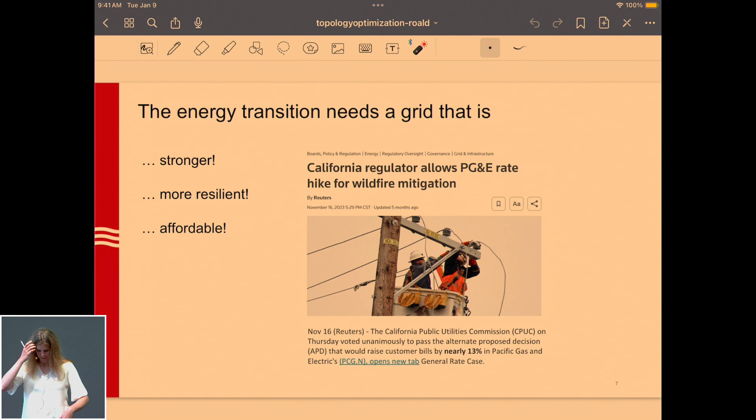So where is the topology optimization, which I promised? What I will say is that topology optimization matters everywhere here because the grid is so important.

Here, what is topology of the power grid? Well, the topology of a graph is essentially the way nodes are connected with each other. So the topology of the power grid you can think of as the way all these different nodes and buses in the network are connected to all the other buses.

So yeah, an outline. So we have 3 hours here. I thought, wow, 3 hours, that's a lot of time. So what should I try and teach you here today?

So the first thing I wanted to talk to you all about is topology optimization. What is it and why is it useful? The goal here is really just that you all should understand what topology optimization is and how it can be useful in different settings.

And then we're going to talk, I'm going to bring a simple example of modeling and optimizing system topology. Here, essentially, the idea is just to give you an example of how do we actually model this mathematically and talk a little bit about the challenges involved in solving those problems. So that's kind of going to be the introductory first part here.

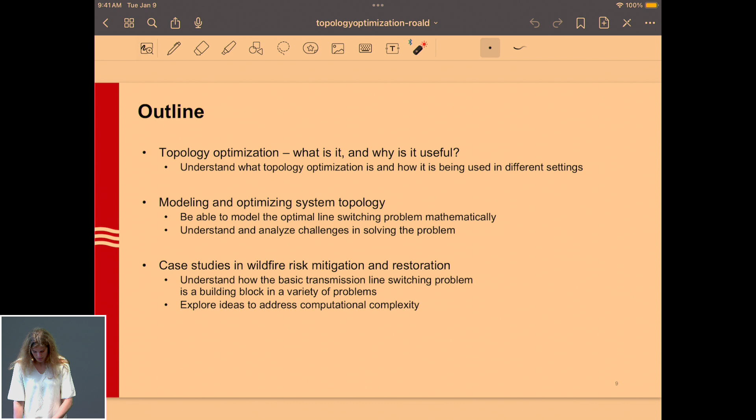And then we are going to do some case studies, looking at wildfire risk mitigation and restoration, where we are going to use these ideas of how we need to optimize the topology of the grid in order to achieve better, more resilient grid operations. Does that sound good?

Yay, great. All right, so topology optimization, what is it, and why is it useful? And so here, again, since it's morning, I can see most of you have found your coffees, that's great.

Okay, so anyone has any thoughts they want to share? How does the topology change?

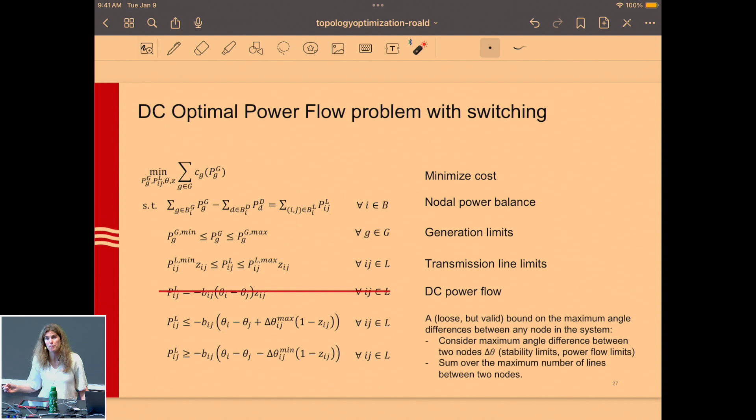You can derive those either from stability limits or from power flow limits. If you have a line that is energized, it automatically gives you a bound on how far apart the angles can be, based on how large the power flow can get. So you can leverage those to get loose bounds on how large the angle difference could become between two different nodes. If you insert those numbers here, you have a valid big M constant. It's possible to get tighter values depending on the type of problem you're trying to solve. It can be worthwhile to spend some computational effort to figure out the tightest values you can find, because your problems might solve so much quicker later.

Okay, any questions on that? Is it useful to go over this? Maybe, hopefully, I don't know. Yeah, okay, yep.

Difference in the voltage, in the angles. I understand that is used in the assumption of the linearization of the transmission or distribution grid. Right, the assumptions that we make. Is it also technically necessary in a physical grid to have the angle, the difference angle?

Yeah, so it's actually kind of interesting. In the DC power flow, they don't hold the same importance as they do in an AC power flow. In an AC power flow, these angles are inside the sine or the cosine. So when you're looking at an AC power flow, there are stability limits that determine how large your angle difference should become. You should, for example, never exceed 90 degrees, because then you'll get an unstable power system. You also typically don't want to go all the way to 90 degrees, you want some leeway there, so a range of maybe 30 degrees is common for an AC power flow problem.

Just to give you a sense of this—I don't know how many of you typically do integer optimization—suppose you have a problem with n binary variables and want to solve it by brute force. Suppose you have a really fast computer that can check 10^9 combinations per second. If I vary n, the number of variables, I get different times needed to check all combinations. With 10 variables, it takes 1 microsecond.

So if you solve a small problem with these integer constraints, you might think that was really easy. But as you go to 30 variables, it takes 1 second. At 50 variables, 13 days. At 70 variables, 374 centuries. And at 100 variables, something like 3,000 times the current age of the universe. So 100 variables is not a lot by brute force—typically the problems we want to solve have a lot more variables, and you'd need a really, really long time to solve them.

So that's the bad news. Doesn't sound very good. The good news is we have good processors. If you look at the speedups that happened up till around 2016, since 1990 processors had a speedup of about 15,000 times—they got 15,000 times faster. So now you can check a lot more combinations a lot more quickly.

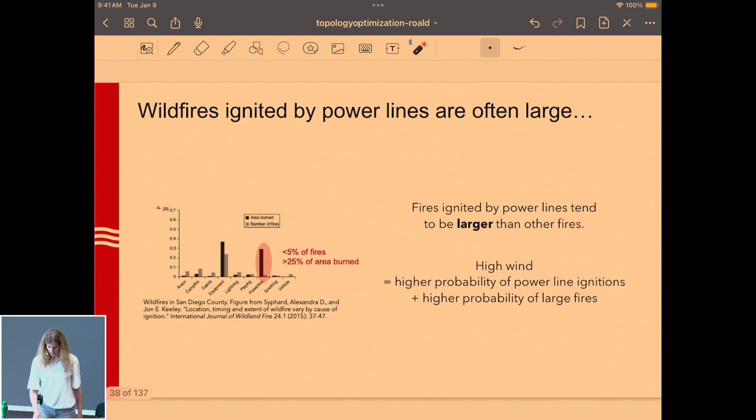Why are these fires so bad? I think it comes back to this question that it often happens during very high wind conditions. So when the fire picks up, it just burns very quickly. In Hawaii and also in the Camp Fire, definitely the cause was just that it spread very rapidly once it started. So there was very little time for people to evacuate, to get away before the fire was just there.

Okay, and then of course here I'm talking about the U.S., California, Texas, the Western U.S. generally, Australia, but also globally, wildfire risk is on the increase, and so this is really something that is important, I think, for us all to consider.

Our goal has been to try to help build models that help utilities plan better. There's been a lot of scrutiny in the US because of these large fires on utilities, particularly in California. I think the California utilities are very good at modeling and managing this risk. But there are a lot of other places, for example in Washington, many small rural cooperatives in different parts of the US that are struggling with knowing how to actually handle this risk.

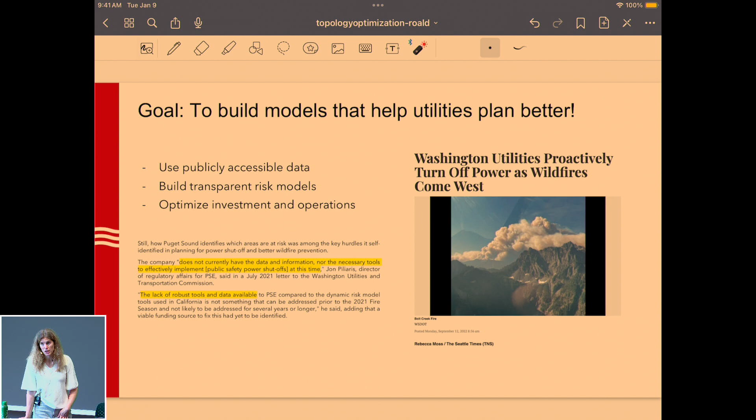So what we've been thinking is that it's important to build models that use publicly accessible data, have transparent risk models, and can help utilities optimize their investment and operations in a coherent way. There's a citation from the Seattle Times on a utility in Puget Sound saying that we really don't have the data or information yet. So these are gaps that would be good to try and fill.

So with that, how do we think about modeling and mitigating wildfire risk? First, in terms of modeling, one way of thinking about wildfire risk is roughly speaking, the product of both a probability that we will have an ignition and the size and intensity of the resulting fire. If you have a very small fire or a fire that burns with low intensity, it's usually not that bad. Many landscapes are fire adapted, meaning that they are meant to burn.

That is a little challenging these days because ecosystems are changing so rapidly due to climate change. That also has an impact on how they burn. But if you have a place which has a lot of biomass built up because you have a lot of trees that have died, or you've been doing fire suppression for a long time, you tend to get very intense fires, which are very bad.

And so the kind of data on this second part is very unrelated to power systems, right? I would say that it's not the utilities' fault that the climate is changing, though they maybe played some part in it. I think it's a little harsh to say it's your fault directly. So they happen to operate in an area where the wildfire risk is a lot higher in many cases.

And so the kind of data you can find on this is things like what is called the Wildland Fire Potential Index, which we've been using quite a lot. This uses satellite data, weather forecasts, and fuel models from across the United States to measure the potential for large fires.

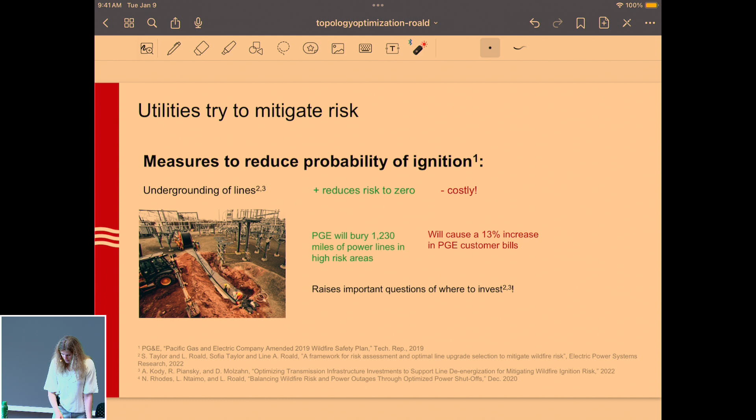Another type of wildfire risk mitigation is just cutting trees better. You can do better vegetation management, cut trees more often, making sure they're far away from the power lines. This is already being done, and if you also do better maintenance of your equipment, you can prevent it from failing so easily. But some risk remains, and there's a significant ongoing cost to vegetation management that someone has to pay for eventually. This is an operational cost, so it does not get passed on to consumers the same way undergrounding does.

Then there's another thing you can do: changing the protection system settings. As I was talking about the reclosers, they close again and again, and every time you close again, you start one more of those like lightning strike fires. It's like pushing the button on that lighter. So one way to try to reduce wildfire risk is to avoid reclosing as many times. But that has the impact that if there's an outage, people are out of power for a lot longer. If you change these settings, the number of outage hours for customers increases significantly, so that's also a challenge. And it's still not clear, some risk remains. When I say some risk, it's partially because I don't know what that number is, and I don't think anyone really does. So these are important questions now around whether we can gather the data to do better risk assessment here.

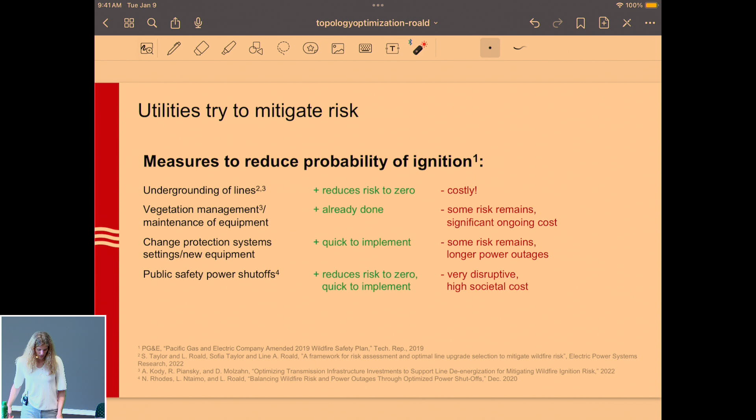And then lastly, the last one I want to mention is public safety power shutoffs. That's the one I'm going to focus on, so I'll talk about that in more detail. I don't know how many people here have heard about the public safety power shutoff?

Again, okay, yeah, our US, California, and Wisconsin participants.

A public safety power shutoff is when the utility says, I'm going to turn off this power line because it goes through an area with a lot of trees. If that line touches one of the trees, there could be a fire. This is too high a risk, the utility doesn't want it, and presumably no one else wants it either. That's why they've dubbed it public safety power shutoff, for the safety of the public, to avoid wildfire ignition. The idea is to de-energize or shut off power lines in high-risk areas, which reduces wildfire risk. But if I shut off the power line, I also cannot send any power across it, so people get power outages.

I first read about this and started reading the plans for these public safety power shutoffs back in summer 2019. I thought, wow, this is really crazy. There had been some regulatory action that allowed much larger public safety power shutoffs. Sure enough, in October 2019, there was the largest such power shutoff to date. This is very effective in reducing wildfire risk, but also highly disruptive to customers.

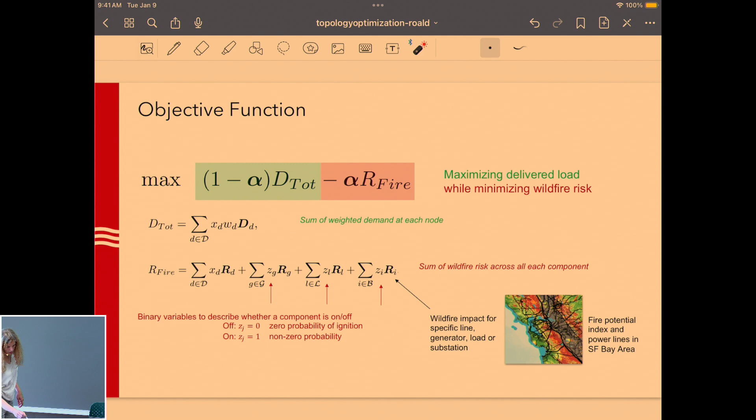So in this map that is here, which is maybe not super easy to see, there's this data from the U.S. Geological Survey, the Wildland Fire Potential Index. It's something you can get for every day. This is released daily for the full day, so it's not hourly. There are commercial products that will tell you hourly risk, and increasingly those are becoming more available. There's been a very large change in what is available, so it's rapidly developing. But we essentially take this risk data for a given day, then overlay the power infrastructure on top of it, and then you can integrate along the line, or choose the maximum wildfire risk. There are different ways in which you can take the wildfire risk values and aggregate it to this R value, and it's really important how you choose to do that. That's also something we've looked at. But that's kind of where those R values come from, you take the ambient wildfire risk and somehow aggregate it to the line.

Yeah, so the maximum? That's a really good question. So it depends. If you look at the whole line, you can integrate along the full line to see what the wildfire risk is along the full line, and say a longer line might have just a higher wildfire risk, so we take that into account. That would mean that a really long line would tend to have a really high value, even if the wildfire risk is low along the line, just because it's a long line. The other way of doing it is to say that for this line, what I really care about is maybe not the small values everywhere, I care about some regions where it's really high. So you could then take the maximum value across all the different points on the line.

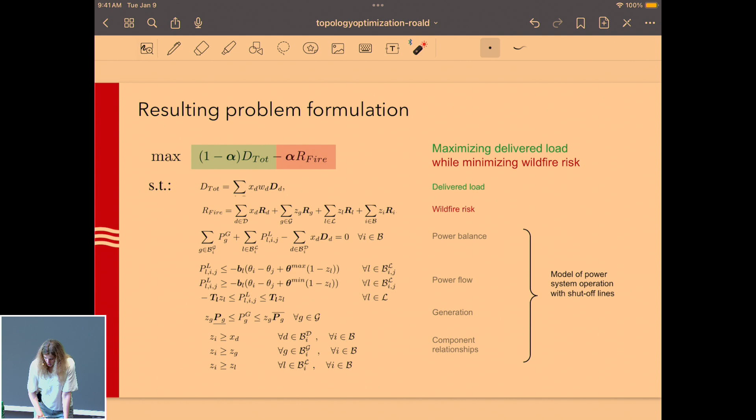So again, this is a mixed integer linear program. We have a whole bunch of integer variables, a whole bunch of continuous variables. And in general, as we know, this can be a challenging problem to solve. So we'll get back to the challenging part, but first I wanted to just show you some results here.

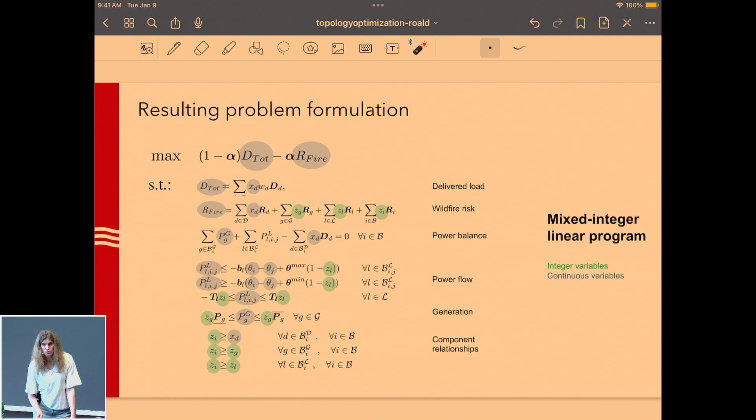So I'm going to show some results on a small test case - the RTS GMLC test case. I don't know if any of you have encountered this system. It is the RTS 96 system, the IEEE reliability test system, originally from '96 - that's why it's called 96. It does not have 96 buses.

It was updated recently by NREL to include a lot more renewable energy generation, and it was also assigned geographical coordinates. So this test case is kind of like a standard test case. It's located in California, goes into Nevada and Arizona as well. You can see it crosses through some areas that have pretty high wildfire risk in this October 2019 case. We were not using directly the USGS data here; we were kind of looking at this simpler risk map. But you can imagine any kind of wildfire risk map underlying here that helps you assign risks to components.

So essentially the risk values are based on California October 2019 risk. The device risk is estimated based on location, so the transmission line risk is averaged in this case and scaled for the length of the line. This is kind of integrating, and then we've adjusted the risk based on voltage levels, saying that if you have a line at a lower voltage level, it has a higher probability of ignition for a given background risk value.

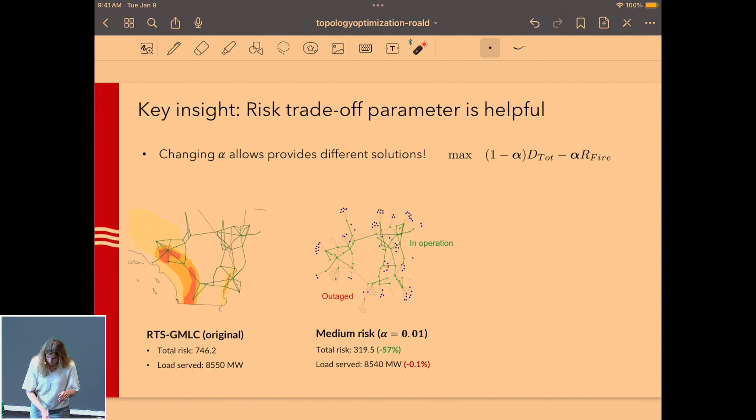You can also now think about another case. If I increase alpha and say I would like the wildfire risk to be even lower, then if I set alpha equal to 0.15, I can reduce wildfire risk by 92%. And in that case, I would shed 15% of the system load.

So you can see on these graphs, everything that is in green is lines that are in operation. This is the same system across here. I don't have the wildfire risk underneath those, but you can see all the lines here that are green represent lines that are still in operation. Everything that is grayed out are things that are de-energized. And the red nodes represent nodes with load shed. So you can see there are more red nodes here than here, and more gray lines here than here, and that's because we are now more focused on reducing the wildfire risk.

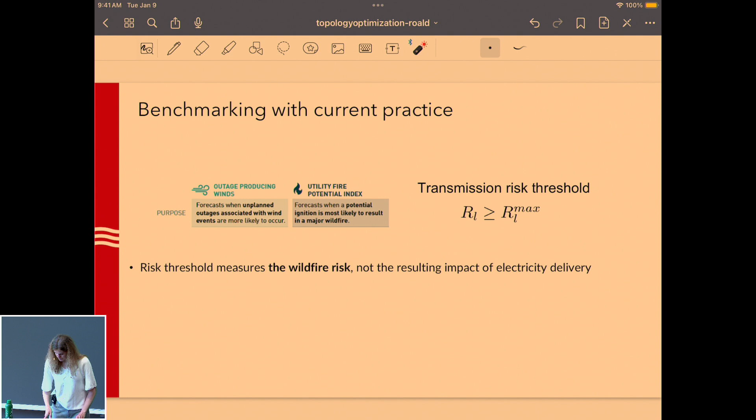So we are comparing this current practice, where you set a wildfire risk threshold, RL max—essentially if you're above that threshold, you have to turn the line off—with a situation where we have this trade-off parameter alpha that we can vary to get different solutions. So we can vary RL max, and we can vary alpha, and then see how our wildfire risk and load shed change.

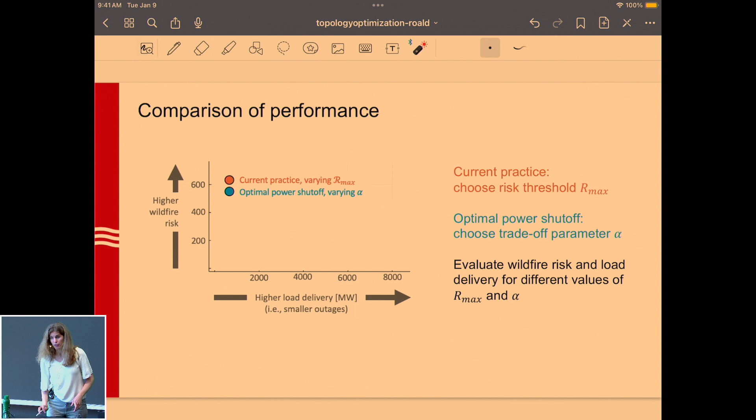So what we do is vary R max and alpha, and we obtain different solutions. The solutions look like this: as we trace out the R max threshold values, we get the orange solution. As we vary alpha, we're tracing out the blue solutions.

What you can see is that our blue solutions are consistently lower than the orange ones—meaning that for a given value of wildfire risk, if I'm willing to set a threshold for total wildfire risk in the system, say 200, then I am able to serve more load if I optimize my shutoff based on this optimization problem, compared with using a risk threshold.

Conversely, if I say I want to serve at least 8,000 megawatts of load, then I can achieve a lower total wildfire risk with our problem here. So we're getting closer to that corner where we want to be, and that is good—our optimization problem works, this tells us.

But it's interesting to also look at the solutions and see how this is possible. So now we're going to compare these two solutions, the star ones, to see how the risk at individual lines looks like.

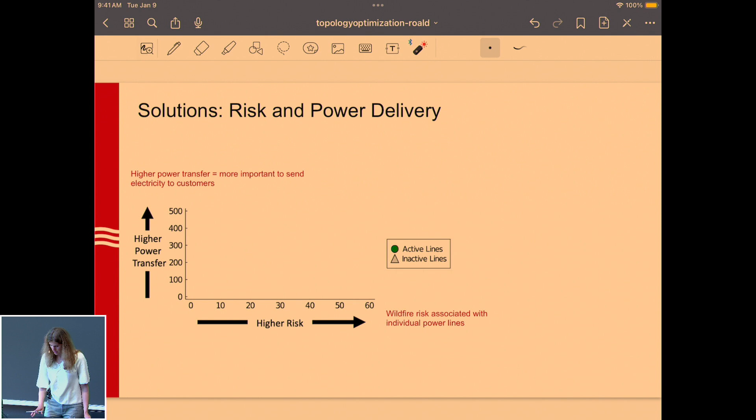We're going to look at this graph, where on one side we look at higher risk on the x-axis—this is the wildfire risk for an individual line—and then we look at the power transfer, how much power is being sent across it. The idea is that as we increase the wildfire risk, we would like to shut down a line more. But at the same time, if I have a high power transfer, it indicates that this line is important to serve load to customers. So I'm going to plot all the lines on here.

But first, before I plot the actual lines, let me describe what this would look like in our threshold-based method. We would essentially choose a threshold, and keep all lines in operation that are below that threshold. So essentially, all the shutoffs are just based on how high the wildfire risk is.

This is an example of a solution obtained with that method. You can see that there are loads being shed and many lines being turned off. In this case, the shutoffs are prioritized only based on risk.

Now I can look at the optimized shutoff and compare this graph with that one. You can see it's kind of similar, and here too there are a lot of high-risk lines being turned off.

But the main difference is that if I have very high risk on some lines, I still choose to keep them in operation. You can see there's a region where, if the power transfer is above a certain value, the optimization problem considers the line important enough to keep in operation, even though it's comparatively high risk.

Of course, there are also many high-risk lines being shut down. Another thing to notice is that many lines that aren't important for power transfer also end up getting shut off, and that's where we save on wildfire risk in this problem.

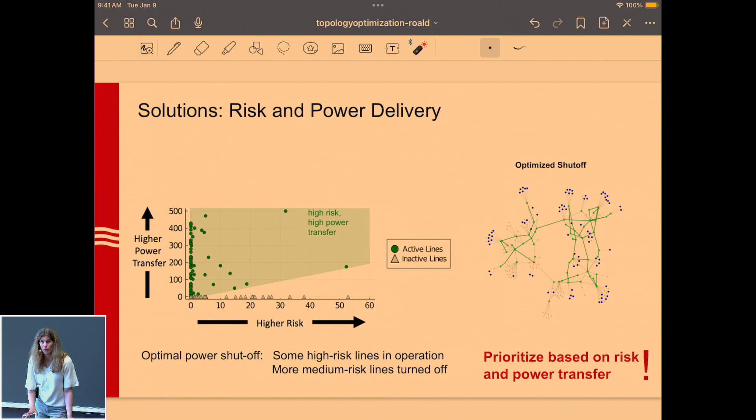One question I wanted to pose is: which do you actually think is better? Who benefits if I do this kind of prioritization based on risk and power transfer? We heard yesterday about market designs and how there will be winners and losers. Here we're talking about rules around how we do public safety power shutoffs. Can anyone think of who would be happy about implementing this, and who might not be so happy?

I think the customers would not be happy because they're getting their power shut off, but probably the utility company would be happier because they're delivering just a little bit less power, so they're not paying as much, but at the same time they're avoiding a catastrophe. So overall, with the power shut off, they would be happier. I mean, they choose to do so to reduce their liability, right?

Yeah, that's really an important point. So if I should choose between this type of shutoff and this type of shutoff, I'd say this one is very easy. If I'm a utility, I look at the shutoff, I look at the risk value, I shut it off. If I'm a regulator, I can say this is the threshold, you shut off your line. So this is easy to implement.

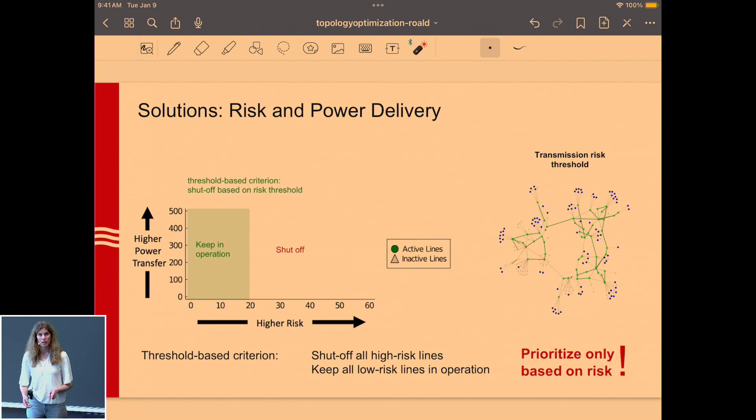This other one is harder, because somehow the utility would have to document that we're keeping this line in operation because it's important for serving power. You could then start considering other things, like maybe this line would sag more because it has higher power transfer, and maybe that increases wildfire risk. There are many things you can consider.

But you can also say this is a bit like the situation where people near a high-risk power line have had their distribution system shut off, but the power line itself stays energized to serve other people who don't live there. If I live very near that power line, maybe I'd also want it shut off, because it's a wildfire risk that's really tangible to me, to my property, to where I live. So I think these are important considerations.

You look at this and say, oh great, we can serve more load with less wildfire risk. But actually, it also really matters who are the people experiencing that risk, in these low-risk nodes that aren't served in this solution. It's possible—we don't know. There are many power lines being shut off that are low risk.

So the question is, are there people losing power because we are shutting down all these lines? Here I'm only plotting the energization status of the lines, not how high risk a certain location is with load. That would be a really good plot to make - maybe I should make that next time. But actually, we are working on that.

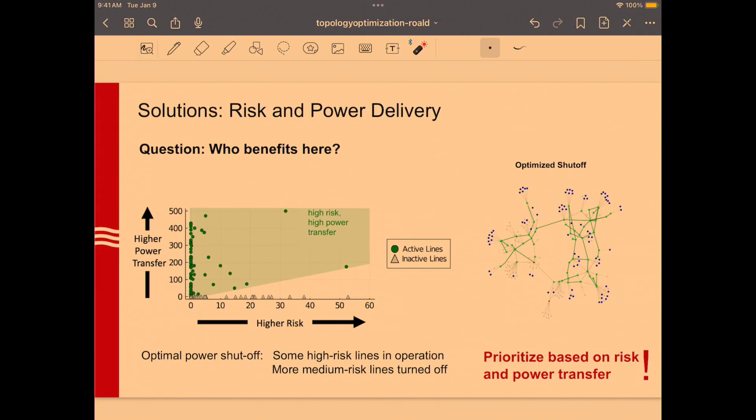Essentially, many of these low-risk lines that are getting shut off are being shut off because it doesn't really hurt power transfer. These lines have zero power transfer because they are shut off, but they are also lines that, even if turned on, would not be necessary. There's a lot of redundancy in the system, so they've been shut off to avoid any risk from them without causing additional load shed. That's the only thing we care about here - we don't care about cost, we care about load shed.

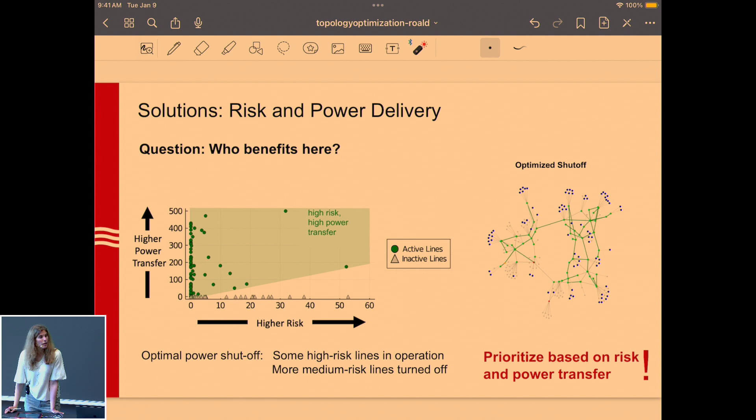Is it possible to use this result - for example, the high-risk, high power transfer areas - to then prioritize undergrounding? Can you use this problem to prioritize risk for lines for undergrounding?

Yes, you can. There's been work in the literature that has done this - Alyssa Kody and Dan Molzahn have some papers on that. We've done some work in that direction as well, and this is something we're also working on with this California system, to look at what this would look like. Essentially, if you want to prioritize which lines should be undergrounded, it's really interesting - this is when it gets really interesting, because this is a problem where your operational problem is an integer problem.

Your investment decisions should be made considering a whole lot of different days - many different days, many different wildfire risk scenarios. So you have this very interesting optimization problem where you're optimizing investment decisions that are binary decisions, like which line are we going to underground. Then your undergrounding decisions impact which lines have to be turned off. So it's a sub-problem that has binary decisions, and as we already heard yesterday from Rodrigo, these are very, very challenging problems to solve. But you could definitely use this as an input to decide which lines should be undergrounded to avoid power shutoffs.

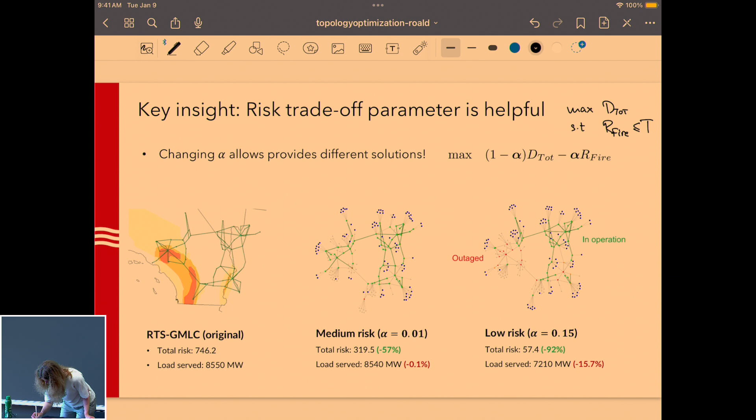If I take the objective function here, and instead of having both terms in the objective, I say I'm going to maximize the total subject to the risk of fire being smaller than some threshold t - if I then vary t, it would be similar to varying alpha.

We'd be more happier with this, and maybe if we just change the approach with an epsilon constraint, it would be more clear. I think that's a really good point, that with this kind of formulation, maybe it's easier to assess who is taking on the higher risk. I could also be more clear about where that risk is.

This is exactly one of the cases where it matters a lot how you choose to model this objective.

In fact, this is one of the things we've also been thinking about, like what if you have a constraint like this, can you not only constrain the total risk, but also constrain risk more locally, and in that way look more at the geographical spread of risk.

That's definitely a very interesting question. So you can look at equity, fairness, a lot of different considerations like that, and also winners and losers more generally.

All right, so that was a lot about modeling. I'll continue because I know there's going to be lunch, but if we take a break now, I don't think we'll come back here. So I'll take a bit more time, and then maybe we can end a little early.

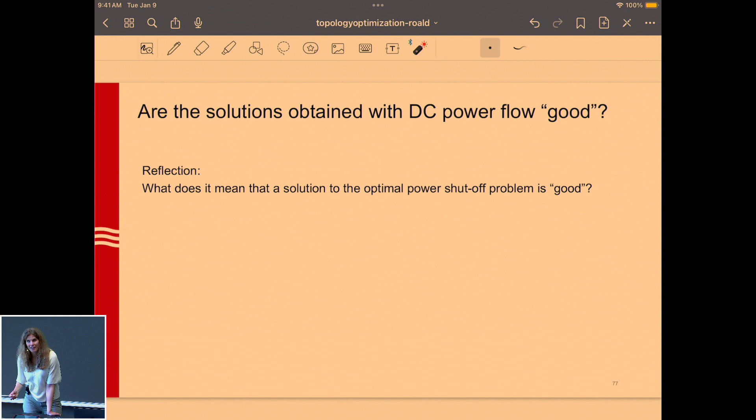Right, exactly, because I'm talking about power flow here. The real question we had was whether the solution is going to be AC feasible. Can we take the solution we're getting with our DC approximation and actually implement it in the grid without breaking things? So yeah, that's what we did.

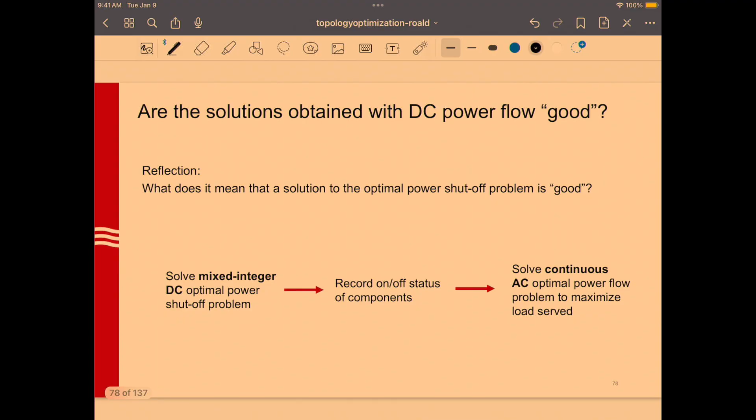You can think of this as a sequence of things you can do, where you solve a mixed integer DC optimal power shutoff problem. One thing I can tell you is that the solution you're getting is not going to be AC feasible. That would be a rare event, okay? It never happens.

So the question becomes, what is it we can learn from this solution that is helpful? The interesting thing here is the on-off status of the components. The reason we want to use a DC power flow approximation is so we can solve a linear mixed integer program, because linear mixed integer programs are hard to solve, but nonlinear, non-convex mixed integer programs are way worse.

So we solve this mixed integer DC optimal power shutoff problem, and we record the on-off status of components—this was de-energized, this was not de-energized. Then we take that and put it into a continuous AC optimal power flow problem where we're trying to maximize how much power can be served. In this case, we could also, for example, integrate economics into that part.

So that was how we went about solving that. We were not only interested in understanding what happens when we solve it with a DC optimal power flow problem, we also wanted to test other power flow formulations. In this optimal power shutoff problem, this blue part is essentially the DC power flow approximation, and what we're going to do now is switch this out with other power flow formulations.

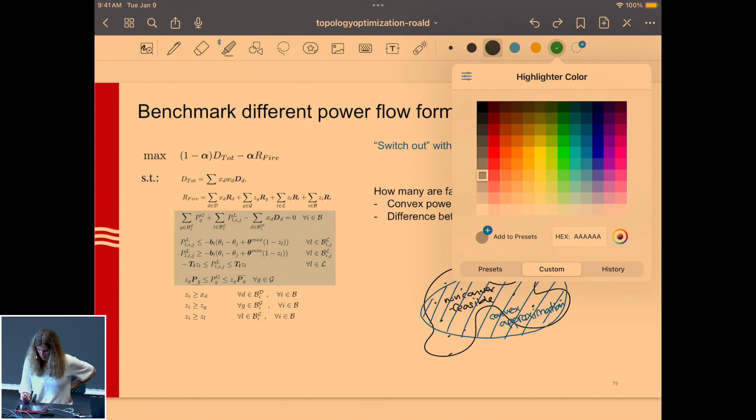...that it covers part of the black feasible region here. So the feasible region of my original problem—these are all the solutions that would be okay to use—that is this gray region. You can see that my approximation overlaps with the gray region, but it has some parts that are outside.

So the blue approximation: some of it overlaps with the gray, some of it is outside of the gray, and some parts of the gray are not part of that. So that is an approximation.

Now a convex relaxation would be something that tries to encapsulate the whole gray region inside a convex shape. So this would be a convex relaxation. The important piece here is that it needs to contain the whole gray space, and if we want it to be convex, it also has to be convex.

There's been a lot of work in coming up with good convex relaxations of AC power flow equations, because we like convex optimization problems—they help us find global optimal solutions, help us prove infeasibility, help us find lower bounds. Lots of good things about them. So that was a little bit of an aside.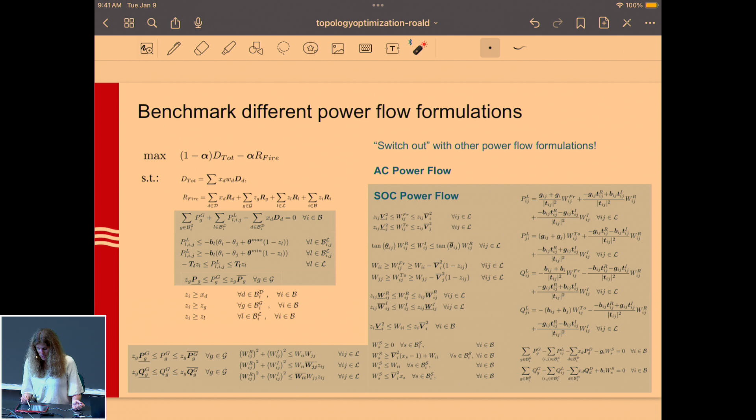It becomes even more complicated when you look at the convex relaxation. This is the SOC power flow relaxation, where we essentially relax the voltage products in the formulation—taking the voltages out of the equations and replacing them everywhere with products between the voltages. I'm not going to go through this in detail, but I'm happy to talk more with any of you if you're interested. Essentially you end up with a whole lot of different equations, and this is a bit complicated.

Then we are doing one that is simpler than the DC approximation, and that is network flow. In network flow, there are no physical limitations on where power can flow, except that we want to adhere to the power flow limits. So in this case there are no voltage angles, nothing—if you have power at the node, you can choose which line to send it on, as long as you adhere to the power flow limits.

So we were trying to look at these three different formulations in addition to the DC OPF and look at how good the solutions are that we're getting. And then I wanted to say, does this look complicated?

Particularly the SOC power flow, I think, is kind of involved to implement.

Okay, so what is it we see? I asked the question, which of these power flow formulations actually gives us good solutions? The way we do this is that we solve an optimal power shutoff problem to determine the on-off status of components, and then we solve a continuous AC optimal power flow afterwards to check if the solutions can be made AC feasible by maybe redispatching generation.

When we are doing this, we're looking at the IEEE 14 bus case here. We're looking at 500 randomly generated instances where we are just randomly generating risk values and randomly choosing an alpha value between 0 and 1. Then we solve all of these instances of the optimization problem with our 4 different power flow formulations.

So now we know that DC and network flow have low solution quality, which is not great news because for SOC and AC power flow formulations, we have really long solution times. This is on a log scale - we are plotting the solution times for the different systems. You can see that network flow and DC are always at least an order of magnitude below the SOC, and the AC is like a couple of orders of magnitude above that again for different systems.

These blobs represent distributions of solution times across the 500 instances. That's why it's blobs and not dots. But essentially, I think the separation here is very clear. You can see that network flow and DC are very similar - they provide similar solutions, they have similar solution times. They are similarly bad.

SOC is much better than AC, as you can tell here. It's much faster. AC only solves up to a 14-bus system. The SOC solves up to the 39-bus system. But beyond that, we are not able to solve either AC or SOC in this case. I'm not saying not able to solve, it means it didn't solve in 30 minutes. Because we were solving 500 problems, we didn't have time to wait more than 30 minutes for them to solve.

So essentially, the bottom line here is that DC and network flow are providing bad solutions, but they are kind of scalable. SOC provides really good solutions, and it scales better than AC, but it's still really limited. So this is kind of our ongoing work right now, looking at how can we scale SOC better? Can we make it go faster and quicker so that we can use it for even larger problems?

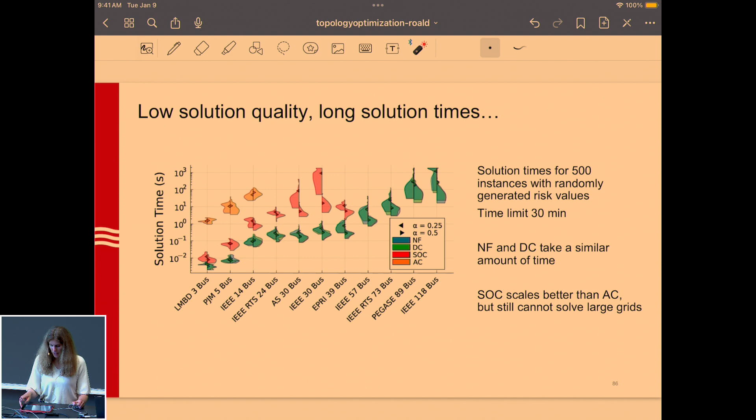So this is a little bit about how I think it's important to think about what does it mean that a solution is good? Because I think it's very important to not think that a good solution here needs to make both good integer decisions and good decisions for the continuous variables. It is perfectly fine if this DC optimal power flow problem had a rubbish generation dispatch, as long as I can take the solution and obtain a good generation dispatch using a continuous AC optimal power flow. The important thing here is the on-off status.

And I think this is very important in general when we're doing topology optimization and optimization problems with integer variables: in many cases we have to solve an approximation to obtain integer decisions, but then we can do other things later in order to try and get a better solution. Does that make sense? Important takeaway, okay? If you ever have to solve an integer problem, remember that it's not always going to be possible to solve a really detailed model with that, and that's okay, as long as your integer decisions are good.

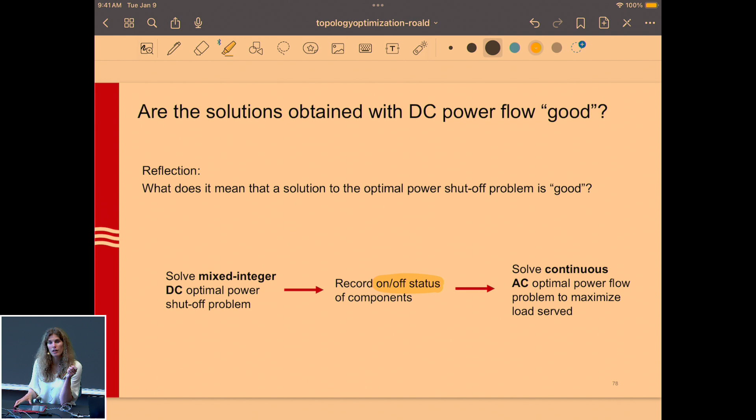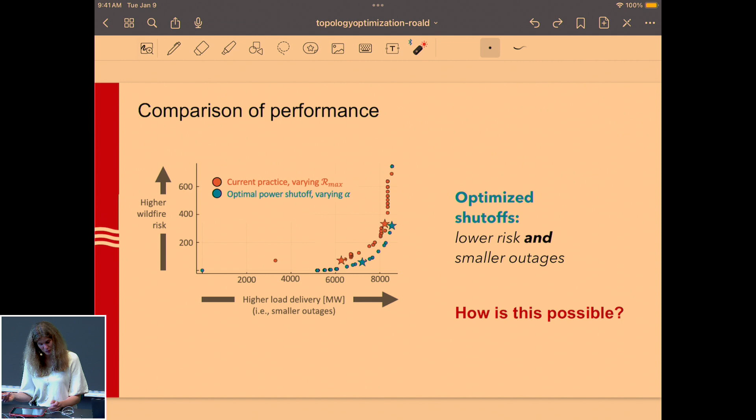Okay, so let me just restate your question to make sure I understand correctly. Here, we were saying that we are getting better solutions than this one. Does this still hold true when we are putting it through the AC feasibility check? We haven't done that. It could be a really interesting one to see because it's not clear how they would compare to each other. I would kind of hope that our method would be better, but then again, who knows? I mean, I don't know. I can't really say, but that's a really good question. I will go back and check that, I guess.

But you can use them as a starting point, right? Just to try to give a warm start, maybe that also makes sense. To try and give a warm start, yeah. Yeah, I think that's also an interesting question. I think, so yeah, there are ways, and we have also looked into that, like kind of trying to help the problem a little bit here.

There are things that you can do in order to try and reduce the number of low-risk lines that you want to switch. So for example, you could use this Rmax threshold, or you could put an Rmin threshold and say that actually I'm never going to switch off the lines. I'm just not going to consider switching off lines for wildfire risk mitigation because I don't want to deal with those small risk lines. They can be on always. That helps. You still have to actually, in this problem, be able to switch them off because otherwise you can run into infeasibility.

So there's a lot of, particularly when you go, and I will just say this, particularly if you wanted to solve this full problem with AC power flow, it's actually really challenging to make sure that you are able to always get a solution to this problem. There are so many quirky things that can happen here about voltages that need to be able to go to zero and other kinds of things.

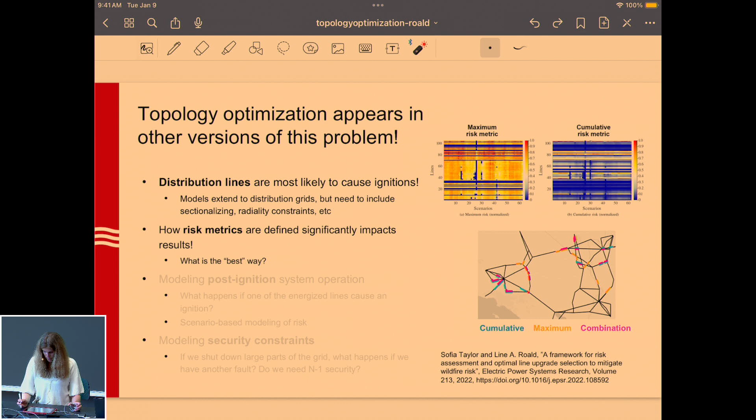So here's one reference on this. We have another paper also that has looked at this, trying to understand these trade-offs. That's kind of an interesting question, and I think an important one to be serious about - you really need to consider distribution, and maybe also in combination with transmission. As we have discussed, how you define risk metrics really impacts the results, and what the best way is I am not entirely sure. But this is a paper from the previous PSCC that also discusses and gives some insights into that.

You might have wondered, when I was modeling risk based on this big wildfire risk map, that is a rather crude way of modeling risk. Wouldn't it be much better if we model individual ignitions, and say the probability of an ignition at this point is X, and then model how a fire would spread, and then make de-energization decisions based not only on the probabilities of ignition but on the resulting fire more directly.

So we have some collaborations, we have been working with some collaborators on doing this. Another paper will be presented at PSCC next week, as well as a journal paper to reference here, where we were modeling this as kind of a two-stage or multi-stage program, using what is called stochastic disruptions, where there's a stochastic probability that at any point in time there will be a wildfire ignition risk, and then we model the operation of the grid after that as well.

I think this is a better way of modeling risk, but it's also computationally very intense. So I think we're down to a question of what's better, and where's the trade-off between having a more detailed risk model versus a solvable problem. We often get there in power systems optimization, and here's another example. But happy to talk more if anyone's interested.

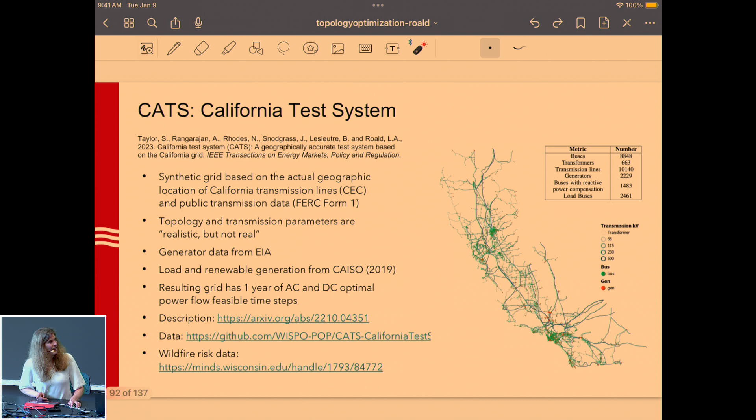Okay, so I had said I'm going to do another part on case studies, but I knew it was going to be a lot of material, and I wanted us to have a little bit of discussion. So we're not going to go into detail here, but I want to mention one thing, because it's related to topology optimization, and trying to exploit the structure of a problem to get close to an optimal solution quickly.

The problem we've been looking at is about how you do optimal restoration ordering. Imagine a system where a lot of it is out because of a storm, a public safety power shutoff, or something else, and you actually have to go out and fix things. Which line should you go fix first? If any of you have had a power outage, you know this can take a lot of time. We had tornado warnings in Madison last week, which left lots of people without power for a long time.

Thankfully, we didn't get the tornado, but we had a lot of very high winds and a lot of trees that fell down. And then it takes a really long time for the utility to come. In some cases, it's kind of obvious where you should go first—you want to prioritize repairs that serve many customers. But in some cases, like a public safety power shutoff, you have to prioritize where people go first.

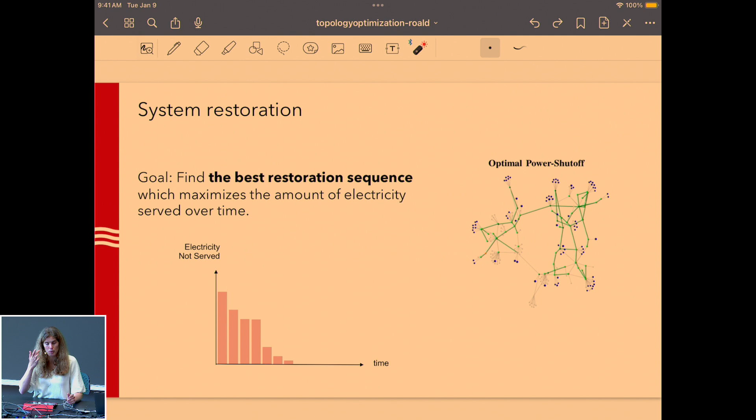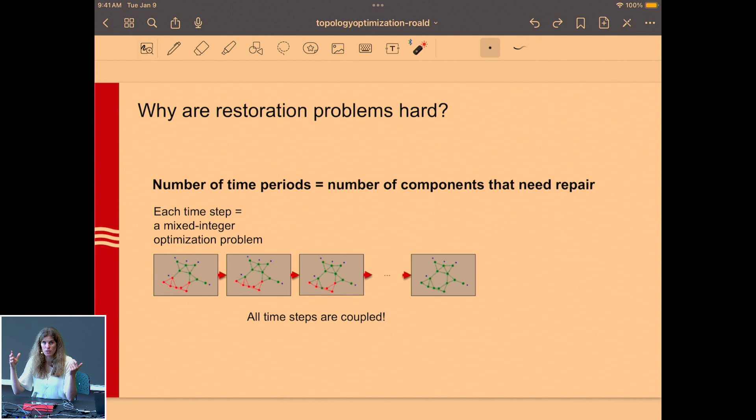This is a really, really hard problem because you have a mixed integer optimization problem where at each time step, your mixed integer decisions are which line you're going to go repair. And because you're looking at the sequence of repairs, all of these time steps are actually coupled. So you have to have a number of time steps that reflect the number of components that are out. If you have a lot of things that are out and damaged, you have to think about a lot of different time steps. This makes the problem very, very challenging to solve.

So there are two things we have explored in terms of how you can go about solving this. Option one is to look at different power flow approximations and relaxations. Since we've talked about that before, we're not going to go into that.

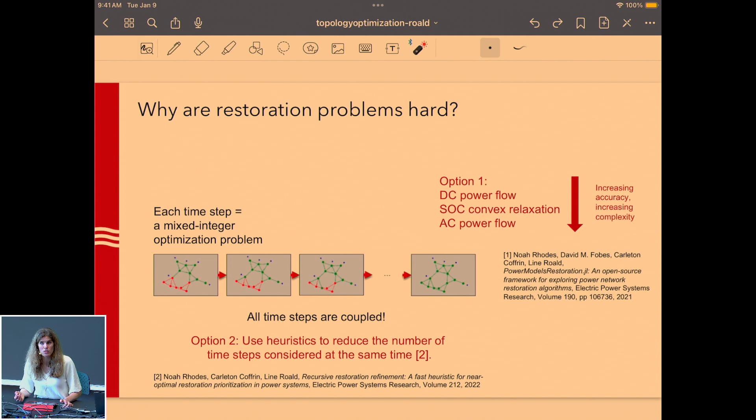The one thing I do want to talk about is using a heuristic to try to reduce the number of time steps we have to consider simultaneously. If I want to solve the full problem, I have to take all of the time steps, couple them together, and put them into one big optimization problem. But now I want to look at, can I make it simpler?

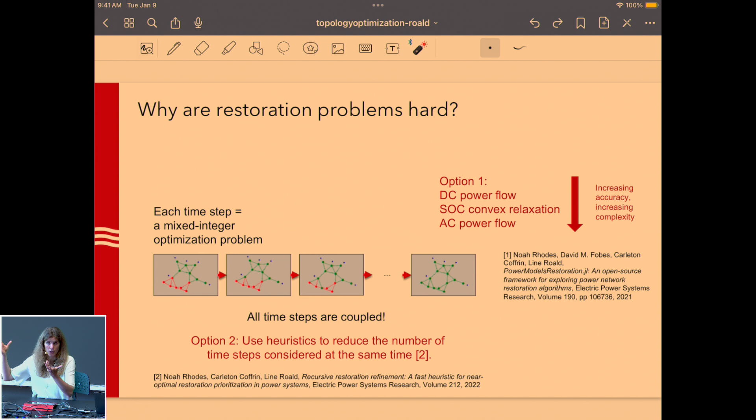One option here is to do greedy optimization: in the first time step, solve the problem and repair one component, then next time one more, and one more. The problem is that sometimes if you look at repairing 3 lines together, they really have an impact on the amount of load you can serve, but if you repair any of them individually, they wouldn't. That's the reason why optimizing the whole sequence is important.

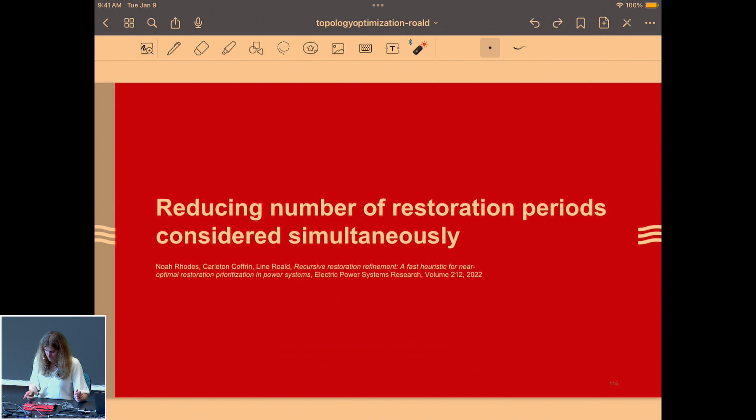I'm not going to go through the power flow formulation here, but I do want to talk about our ideas on trying to reduce the number of restoration periods you have to consider simultaneously, while avoiding falling all the way into this greedy approach, keeping some information about the sequence. The algorithm we came up with is called recursive restoration refinement. The idea is that you start out with n components in the power grid that you need to repair.

In the first step, you're only going to split your repairs into 2 groups. You say this half of components needs to be repaired first, and this half can wait until later. Essentially what you're doing is maximizing the amount of load you're able to serve halfway through your restoration process.

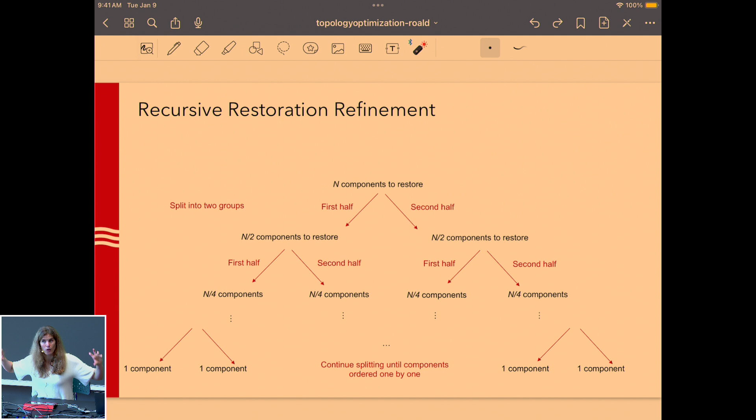Then you can take those again and split it into a first half and a second half. Now we're maximizing load served at 4 different points: after 1/4 has been repaired, after half, after 3/4, and after all has been repaired. You keep going like that until you've split everything, all the way down to 1 component each. So you're solving a lot of different optimization problems, but every time you're only considering 2 periods.

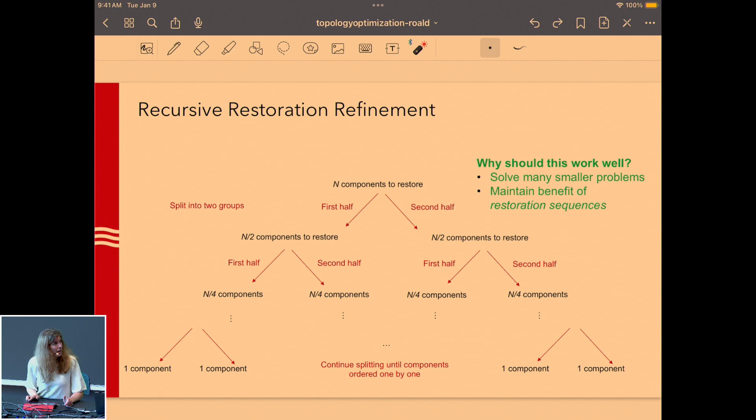And so as we're doing this, we're really hoping that solving many smaller problems is easier than solving one big one, and that we maintain some benefit here because we're looking at restoring groups of components together. Did I see a question? No? Okay, good, I will not hold you back from lunch.

This is the bottom line. So does it work? We were comparing this method against some other methods, though the colors here haven't worked well. ROP here is solving the full problem. We compared this recursive restoration refinement with solving the full problem, as well as with a state-of-the-art heuristic algorithm and the simple industry heuristic where you just repair the largest component first. Essentially, our solution algorithm that splits this in half achieves very high solution quality in very short time. So by splitting this sequence always in half, we're able to solve it 1,000 times faster than the best known heuristic.

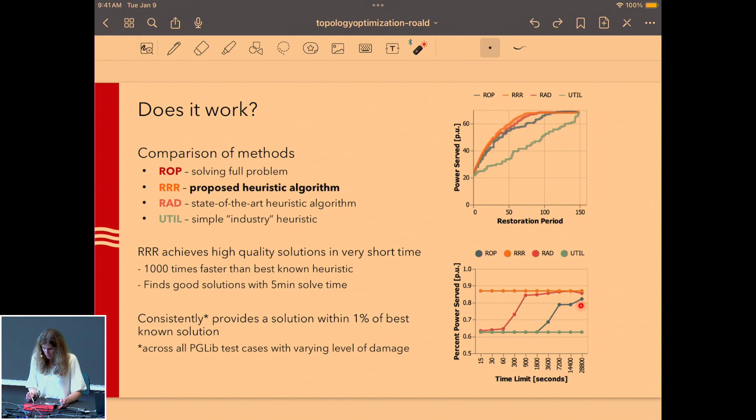It really tends to find good solutions within 5 minutes of solve time. This is the percent of power served, the quality of our solution, versus the time limit. You can see that our recursive restoration refinement finds the best solution we know of in 15 seconds, whereas trying to solve the full problem, we're still trying to get there after 28,000 or 29,000 seconds. Essentially, across a whole range of different systems and damage levels, our solutions are always within 1% of optimal, of the best known solution. In some cases we don't know if it's actually optimal, just that we're within 1% of the best solution we were able to find.

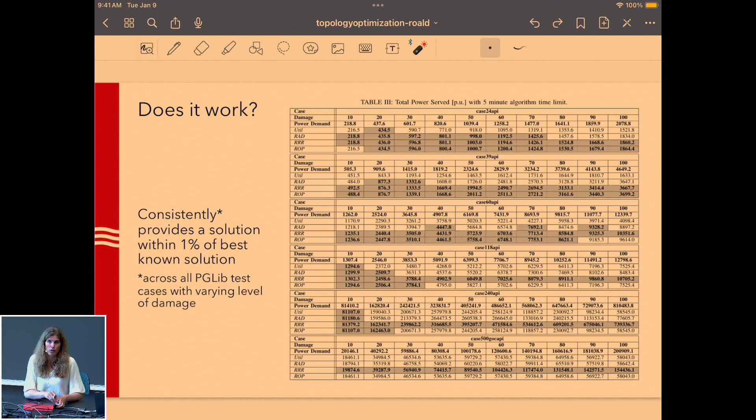So it's a bit of a custom thing here. Sorry, I've really hammered on you a lot, and we're past 12, and I know there's lunch coming. What I wanted to say is that I hope you got the impression that problems involving topology optimization can be important, fun, and challenging. I think it's really, really hard, and that's good for us because we are researchers, right? If it's not hard, where's the fun?

I also firmly believe that being able to solve those problems more efficiently can improve a variety of aspects in power systems operation and planning, and there's a huge room for improvement. We know solvers are getting better, but we still really struggle with solving even moderately sized problems. I believe in optimization and formal optimization. I also like machine learning, there's a lot of cool things about it, but there's something about being able to talk about optimality gaps and measure that. So if you're a person working on machine learning, this could be a cool problem to look at, but also keep in mind that optimality is kind of cool as well.

In particular, integer optimization internally relies on a lot of heuristics, and there's a lot of work going on the integer optimization side in terms of trying to leverage machine learning to improve those heuristics. So that's for anyone interested in that side of things. I wanted to put in a little bit of machine learning here as well.